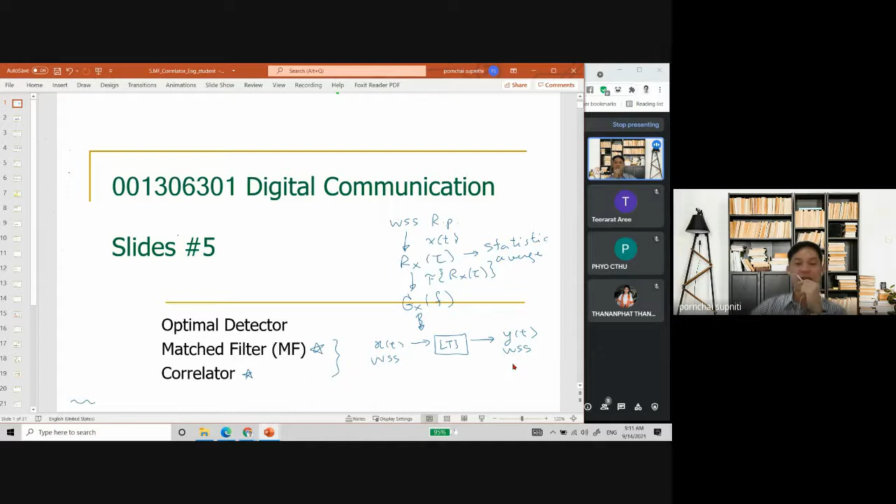And I think last time we did this, my is equal to mx multiplied with h of 0, where h of 0 is the DC of the linear system frequency response. And also for the power spectral density of the output, it is magnitude of HF squared multiplied with power spectral density of the input. So these are the main results from last time.

So today we are going to come back to what we were left off from the last 2 or 3 lectures, because we spent a lot of time looking at the noise and the random variables. So today we'll come back to a system. So what are we going to look at?

Let us consider a simple communication system with an additive white Gaussian noise channel. So whenever we talk about transmitting some data bits, modulated, this is modulation, it becomes pulses, and then we transmit through AWGN channels.

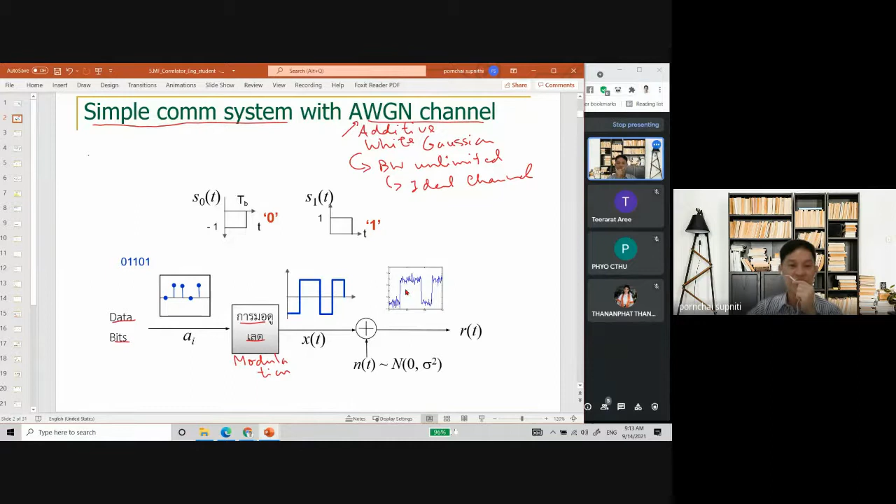Whenever we talk about this, it means that we focus our scope on the channels with unlimited bandwidth, or in a way it's an ideal channel. However, in general, the channels have a limited bandwidth and are also not ideal. But when we talk about some modulation scheme and also how to demodulate it or do detection for modulation like this, oftentimes we only look at the AWGN channel. Later on, we'll look at the channel with limited bandwidth and also with white Gaussian noise as well.

So this is a simple communication system, and in this case, it is just NRZL. For bit 0, we just transmit a very simple square wave of negative amplitude, while for bit 1 we transmit the square wave of positive amplitude, and the length is TB. So that means that the energy is EB.

When we talk about this, let me go through a little bit of information here. When we talk about different pulses for each bit, it means that for E0 and E1, we have the energy for each bit depending on bit 0 or bit 1. If you look from here, let's very simply look at what is the energy of bit 0.

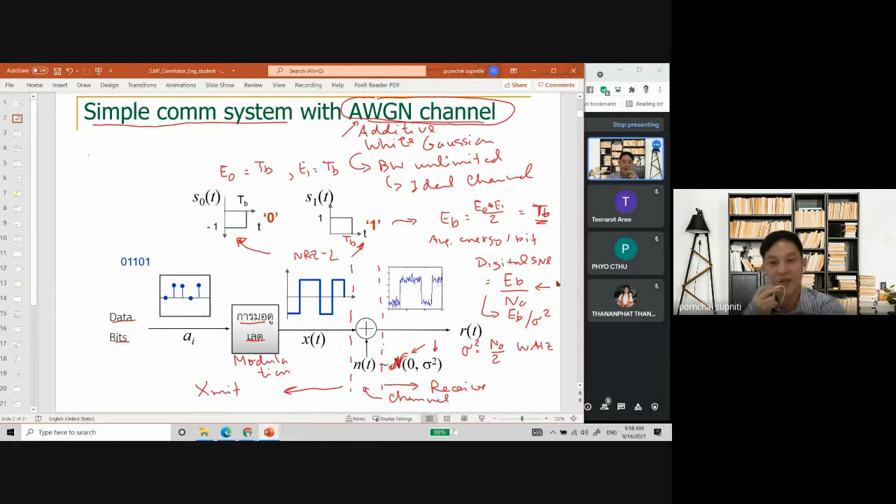Okay, so that's part of it. Next, let's take a look at these slides.

On the receive side, we can find the quality of the receive signal using something called the eye diagram. The eye diagram helps indicate the signal qualities on the receive side. And how is it constructed?

The eye diagram is not a crude way, but a very simple way of detecting the signal quality, and it can be used from the very early part of looking at pulses on the scope that we look at.

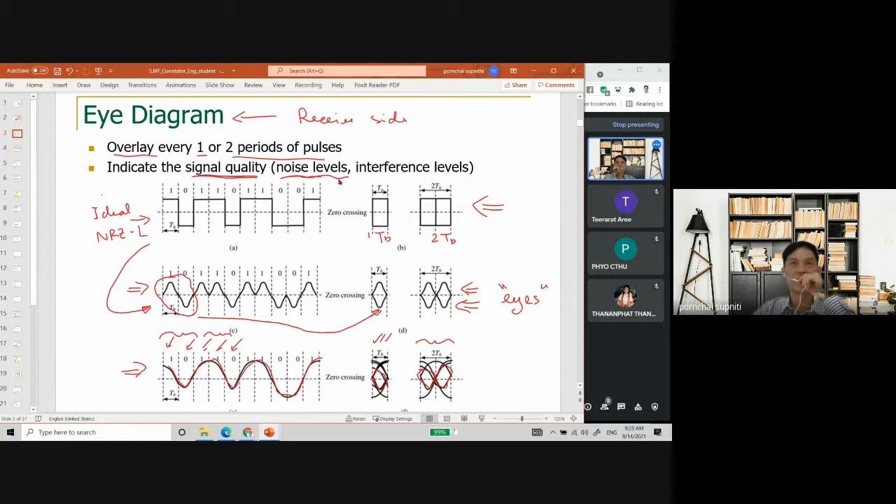So this is what we call the eye diagram. The eye diagram can be used to indicate signal quality like noise levels - are there lots of noise? Are there lots of interference or distortion or not? And also, we can look at the optimal sampling instant.

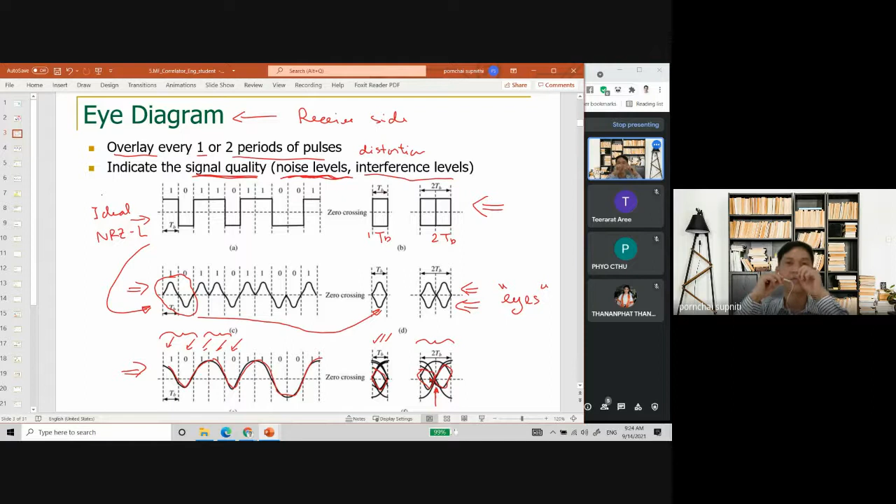For example, if we look here, we expect to see zero amplitude intersect here, but if this zero shifts to the right or to the left too much, it means that when we do sampling, it's not so good. So eye diagrams can be used for different things.

Okay, so let's take a look. I think I'm a bit slow again. Okay, so for a simple communication system like this, how do we make a detection?

So this is R(t), which is the received signal. In general, the signal will be noisy because of the noise in the system. Here, I don't put any effects of the bandwidth limitation, so it's not curved - it's just noisy.

So what can be used on the receive side? So all this is the receive side. A simple way of deleting noise is using a low pass filter.

Teerarat, what is the difference between low pass filter and high pass filter?

Low pass filter will filter out the low frequency signal. Actually, on the contrary, a low pass filter means that it only allows low frequency components. It rejects high frequency components. You can just translate it from the name itself: it only allows the low frequency components to pass.

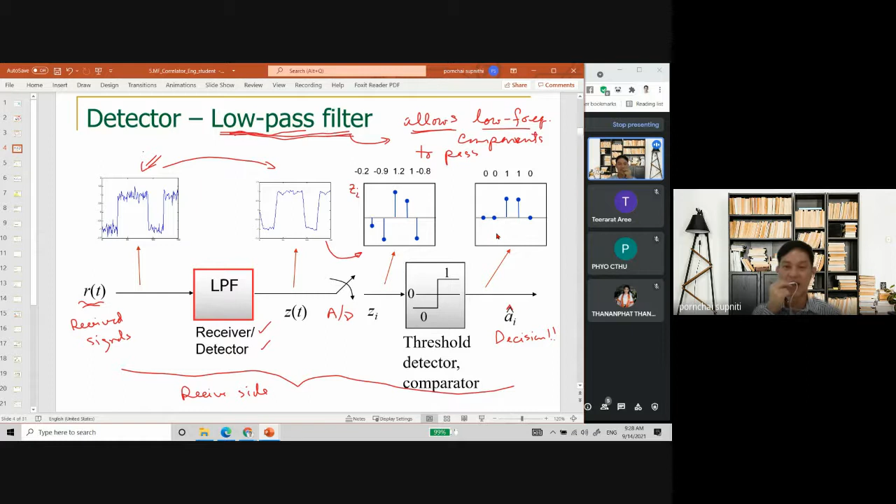You get what I'm saying? Yes. Okay, so we're not trying to duplicate or reconstruct transmitted signals, we're just trying to make a decision of what the bits and symbols are. So keep this in mind. Of course, after you make the decision, you can reconstruct, but maybe some bits are incorrect, so you don't reconstruct them correctly anyway.

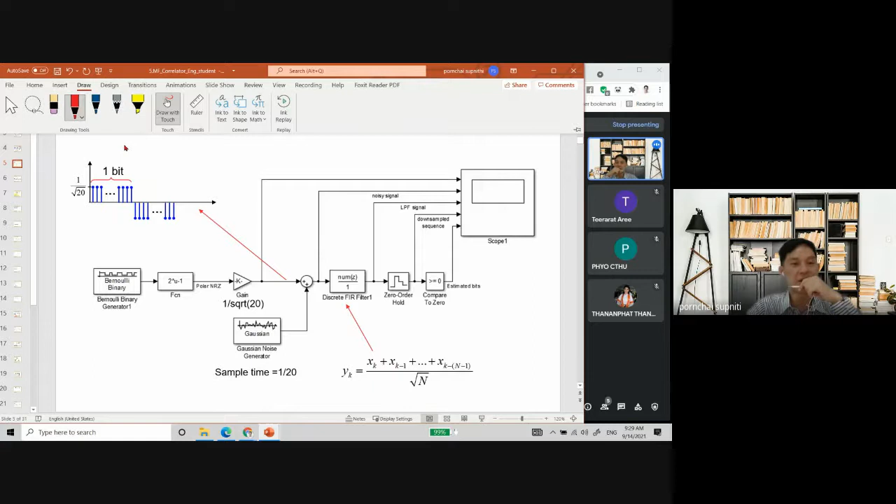Okay, let's take a look at the next one. This is the Simulink system that we are playing with today. We'll use this as a base Simulink system that we can play around with. Let me show you. I think you are familiar with this system already, but because we haven't come back to this for some time, on the transmit side, you know this already.

So in this case, we use NRZL, but we can use something else. And we added noise to it. On the receive side, this is the receive side. We can have a low pass filter here, where we can change the coefficients so that they become a low pass filter, simply by putting all ones, depending on how long this is, divided by square root of n.

So this is one way of doing it. And before the lectures on random processes or random variables, we also constructed here by using some type of filter, right? We used a filter block as here in order to generate different types of modulation schemes, but it's a simple one. On the receive side, if we construct it with a low pass filter, that's all we do, depending on how long it is. And we have A to D, and then we have a comparator. That's it, and this is a very simple setup.

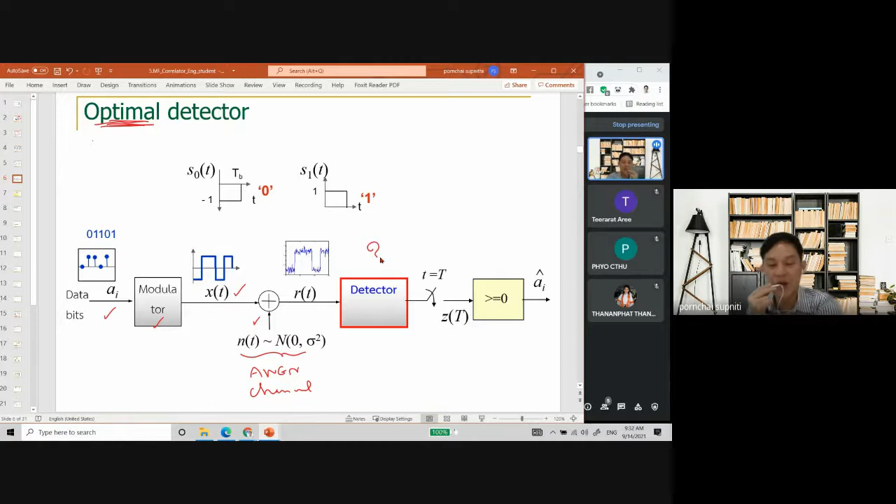To derive the optimal detectors, maybe you can guess, because in this lecture we are talking about two types of optimal detectors. One is called the matched filter, and the other one is called correlators. Let's look at this as a formal statement. So if we are given the pulses S I T, where I is represented by 1 all the way to M, and T is in the range from 0 to big T, meaning that it has a limited amount of time.

And there are M types of pulses, depending on whether they are binary or non-binary. If M is equal to 2, then there are only two types of pulses that are transmitted, okay?

Then we added noise, and then if the detector is a linear time-invariant system, with the impulse response of the detector as H0(t), or the spectrum, the frequency response, H0(F). The question is, how do we design the detectors for the digital pulses? Basically, in order to design the detector, we just need to find the H0(F) or H0(t) that is optimal.

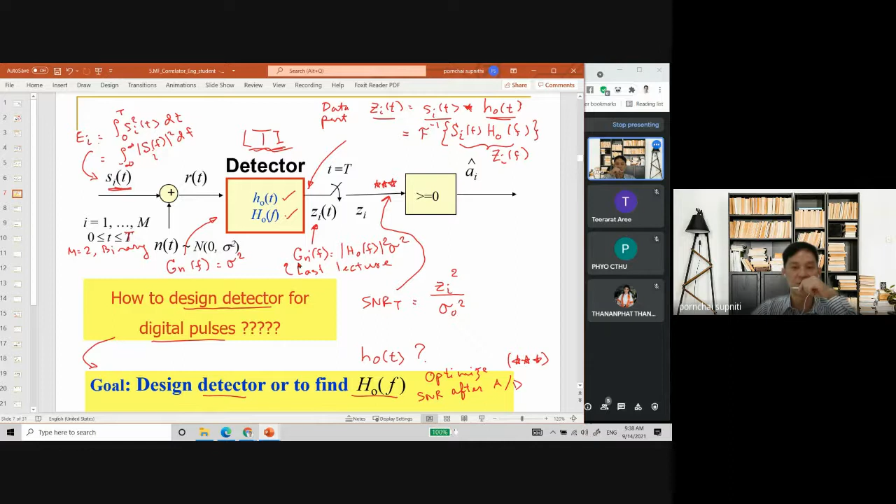So what is the SNR at this point? I can write it as SNR(T), where T represents after the A to D. This will be equal to the data part through the detector, squared, divided by sigma 0 squared, where sigma 0 squared is just Gn(F). So this is what we want to optimize. You can optimize it some other ways, but sometimes if you optimize different parameters, it's not easy to derive what we want.

So do you have any question about these slides? If you have a question, please ask now, because for the next two slides we will utilize these results and then derive the optimal detectors. Do you have any questions so far? Let me see, what time is it? Okay, any questions so far? No? Okay, anyway, so let's take a look more. If you have a question, we'll come back to it.

So let's do a derivation of the optimal filter, and in this case, the optimal filter is actually called the matched filter. So step one, we will compute the SNR after A to D, which is SNR(T) equal to the data part passed through the LTI detector, divided by the variance of the output noise at the back of the detector.

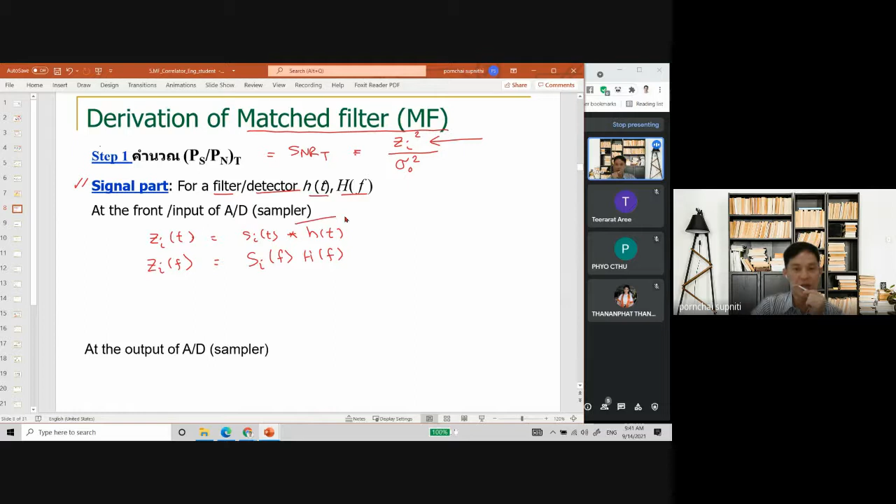So in a way, we can say that ZIT is just the inverse Fourier of ZIF, which is the inverse Fourier transform of, let me write F clearly so we don't get confused with the T, SIF and then HF.

Also for Phyo and Thananphat, I just want to tell you one more time that it's very common for us when we write in time domain, we use the lowercase. When we write in terms of spectrum, we often convert to capitalized letters. That's all.

So this is before the A to D. This is still time domain, right? So at the output of A to D, we have Zi, which is equal to ZIT, T equals to, let's say, at every period, or at every period of the bits.

Also for the inverse Fourier transform, I can write this as integration of SF multiplied with HF dF. This is the Fourier transform formula, and we have to multiply with the exponential term, which is e to the j 2 pi ft, and then the f, from negative infinity to infinity.

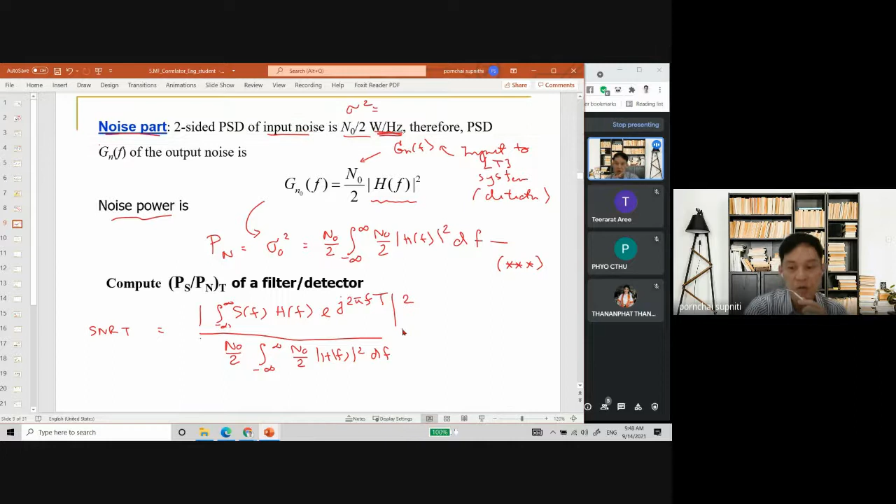Well, from here, maybe it looks a bit difficult, but if you look in the textbook, basically we can use this relationship called Cauchy-Schwarz inequality, meaning that we can simplify the numerator on the last page.

Cauchy-Schwarz inequality says that given two functions, if we have function f1(x) and function f2(x), and if we have a magnitude of integration of f1(x) multiplied with f2(x) dx, the whole magnitude squared, this is less than or equal to the energy of each function multiplied to each other.

This is in a way similar to the concept of triangle inequality. Like in geometry, it's related to the idea that when you add two sides of the triangle, it's less than or equal to the summation of each side added together. But this is in terms of function, so it's a little bit different.

And the equality in this equation occurs when f1(x) is equal to a multiple of f2(x) conjugate. This is conjugate - not convolution - because f1(x) and f2(x) in general can be complex functions.

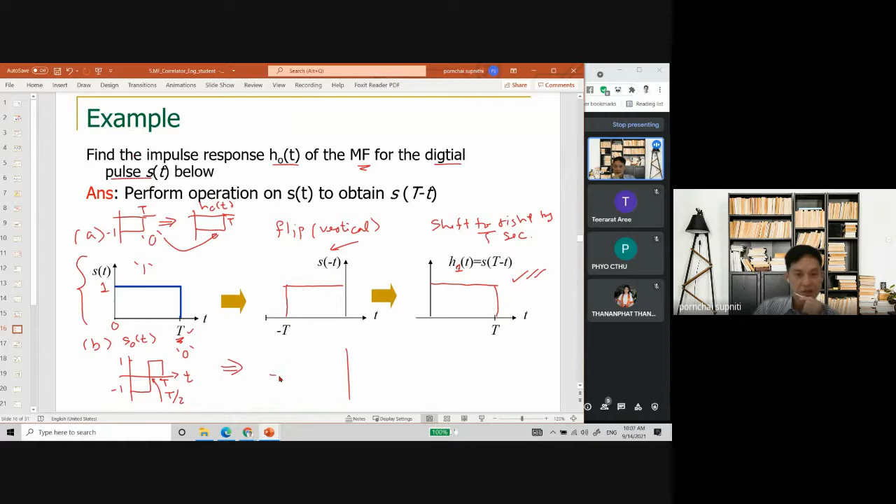First, to find the matched filter, we have to flip with the vertical axis. Okay, when we flip it, what do we get? From -T to -T plus T over 2, what amplitude do we get?

During this period, what do we get - positive or negative? We just get positive. And this part we get negative. And then when we shift to the right, we just get a flipped version of the pulse S0.

Wait, sorry, I think in another class this is called pulse 1. So we just get something like this, right? Yeah, that's why we call it a matched filter.

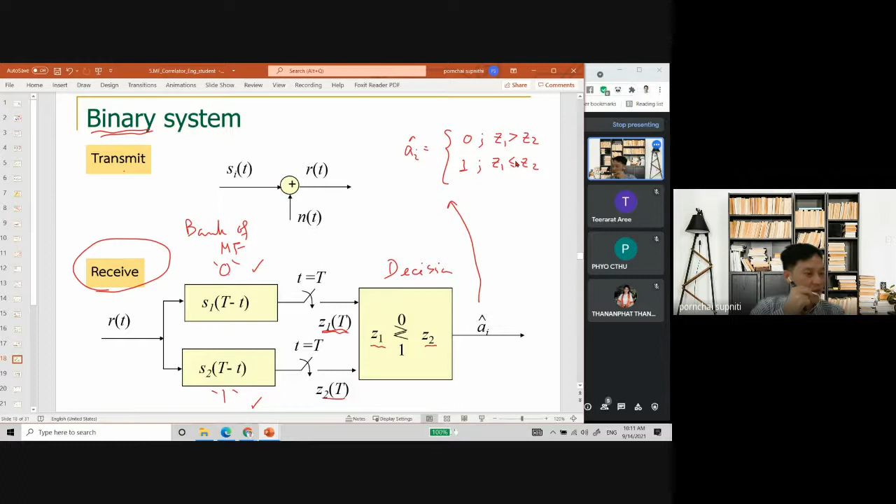So let's take a look at this example, okay? I don't think I have time to go through all the convolution stuff. Anyway, the matched filter, when we look at how it goes in the time domain, is in general a little bit more complex than the other structure. We will look at it after the break, okay? But let's look at this example first.

So this is an example where we want to look at how the signals look like at each step on the receive side. Let's say that on the receive side, at one time we have these positive amplitudes, and this is for an NRZL system.

On the receive side, we have the matched filter for bit 0 and bit 1 separately, so we don't make a decision yet. We just let this pulse go through two branches. Let's look at the bottom branch, it's a bit easier. So what is the output at the bottom branch? The output is this one.

Let me use red color for this, and the top one is Z1(t). So the output is just the convolution of the received signal and the impulse response of the matched filter.

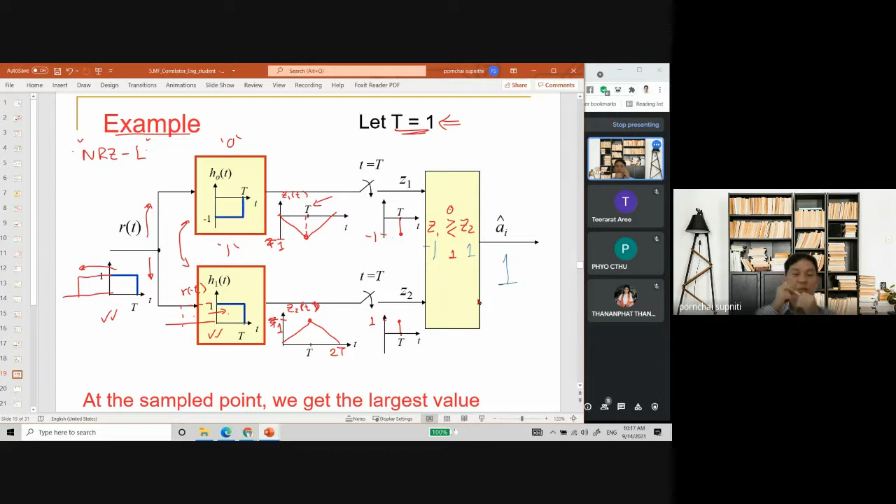Lastly, before we take a break, I want to look at this a little bit more. If you do a convolution of two rectangles of different sizes, let's say one is 1 second and the other is 2 seconds, in this case you get something similar to a triangle, but you get... I don't know what it's called, this shape. So this is 1, 2, and 3. It's basically just the overlapping area of one over the other as you move it.

You can fix one, either one, for simplicity. Let's say you fix the right one and flip the left one, and you just move it to the right. The more it overlaps, the more it travels to the right, the more area you get. When it passes by, suddenly at some point it will go down.

So in a way, matched filter helps collect energy of the received signal. So please review the convolution.

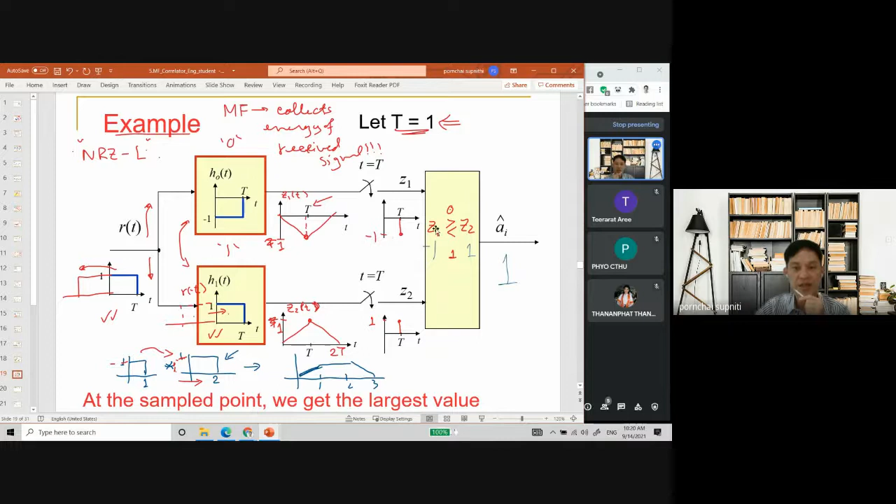If you look at the decision here on the right hand side, instead of comparing Z1 greater than or less than Z2, we can move Z1 to the left hand side, and then we compare with 0. We can do this.

It means that because Z1 is the sampling of the output from matched filter number 1, and Z2 is the sampling of matched filter number 2, instead of having two match filters, we can do it like this.

We have R(t) comes in, and we can pass it through H0(t) minus H1(t). This is because if we look at it before sampling, we have Z1(t) minus Z2(t). This is just integration of R(t) times H0(t) minus H1(t), or convolution, and dt.

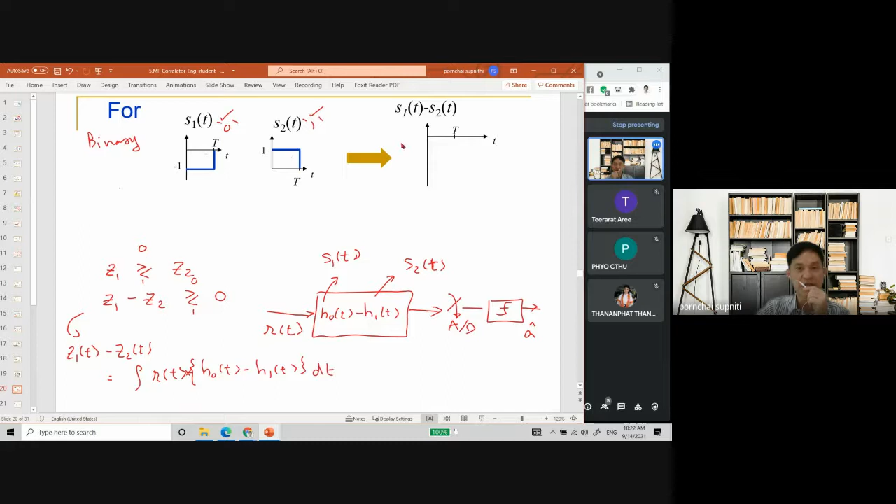We have like this: minus one is minus two, right? So it means that we can have a matched filter like this.

And A to D, and then make a decision whether it's more or less than 0. Let me call this Z. We just compare whether it's more than or less than 0, and then we make a decision.

And also you can flip this thing. I don't need to put -2, I can put -1, because here we only check the sign. I can flip this from negative to positive, but then I have to switch between these two numbers.

So that's the way to reduce the number of matched filters. So we can do the matched filter in Simulink like this.

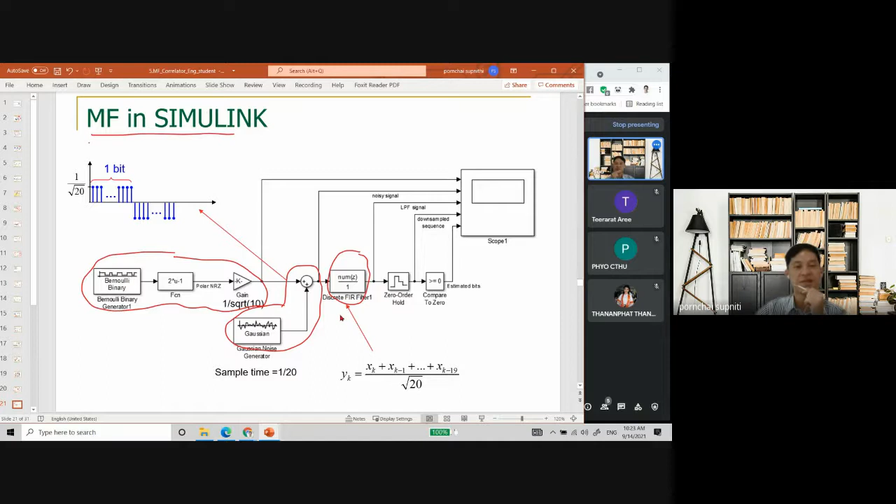So for NRZL, we can just transmit what we transmit, we add noise, and then we can just use one filter and define it as the matched filter. We can define this as matched filter because in this case you can see that the matched filter here is just a constant value.

But in Simulink we will switch. Instead of having this as a negative, in Simulink we will have this as a positive, and switch this. So we'll do this instead.

Let's say big T is 1, and we'll do this instead. We can just define the filters as ones, and depending on how long this is, depending on how many samples you use for each bit.

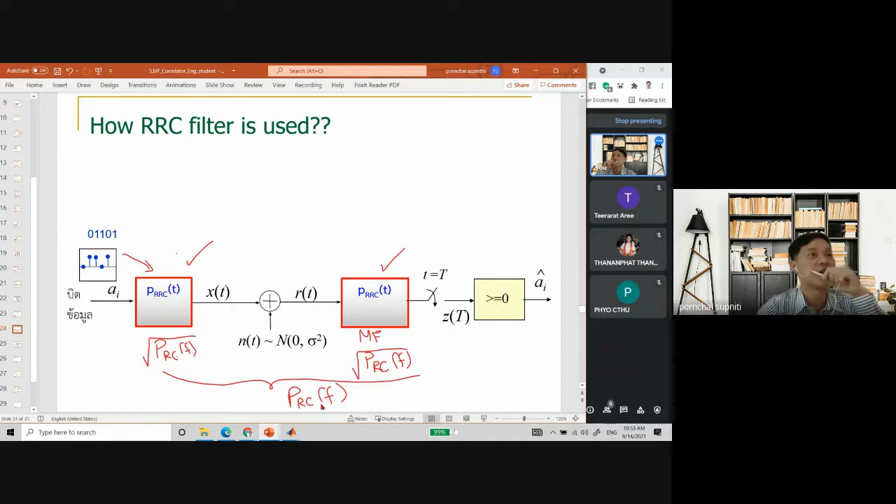Basically what we do here is look in terms of spectrum: for the root raised cosine, the spectrum is the square root of P_RCF. For the matched filter, because it's the same shape, in terms of spectrum we have the square root of P_RCF again. So that means equivalently, from the transmit side and the receive side combined, the pulse that we effectively use is just the raised cosine pulse, because the multiplication gives the resulting filter.

Next, if we have a non-binary system or M-ary system, in this case we cannot reduce the number of matched filters that we use. We have to use M matched filters.

This is the structure: the first matched filter matches symbol one, the next one matches symbol two, and so on up to pulse M. Then we have an A to D for each bank—banks just meaning a series or set of filters. At the output, whichever one has the higher value, we make the decision for that specific symbol. So we have a decision rule: select Si which gives the maximum Z, the output of the A to D. We select the symbol corresponding to the maximum value of all the A to D outputs.

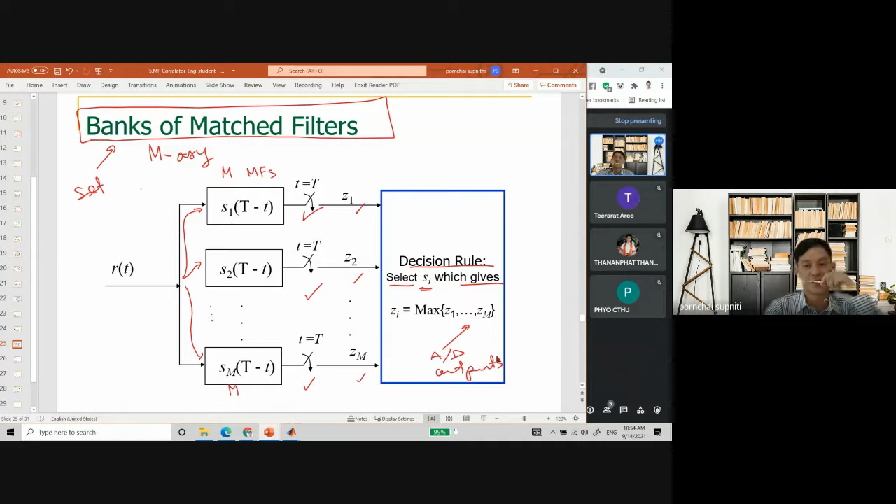So that's what we do. For the remaining slides, I will talk about another structure as an alternative to the matched filter. Let's take a look at it—it's actually much simpler.

This structure is called correlators. As you know from the previous lecture, when we say correlate, it means if we correlate two things—let's say the received signal and some pulse—we multiply them together and integrate within the period or time of interest, whatever it is. So this is called correlators.

Let's derive quickly what the correlator is. From the matched filter, the output of the matched filter is Z(T), the integration of the received signal multiplied with the matched filter. And if the matched filter has the impulse response, let's say H(T), I write it in general.

So Z(t) is actually R(t) convolved with the impulse response of the matched filter in general, which is equal to the integration of R(tau) H(t minus tau) d tau. And for the causal filters...

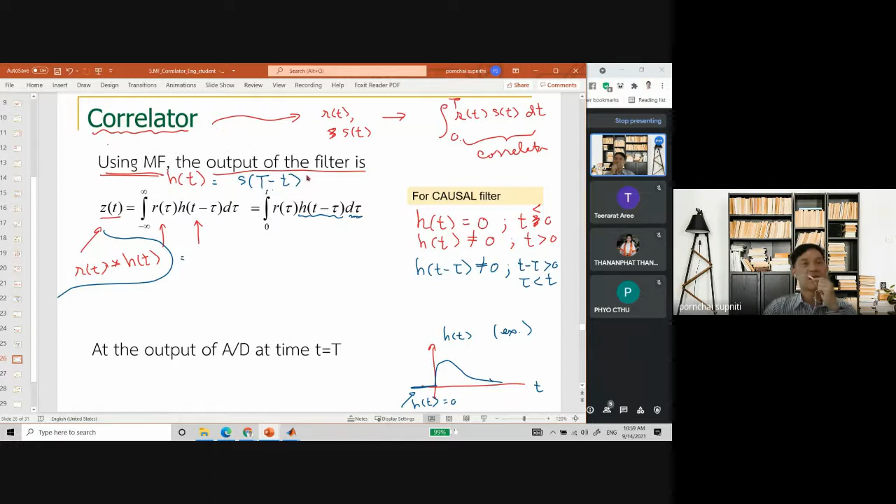So I'm going to derive this by putting in - we know that h(t) is equal to s(capital T minus t). This is from the previous slide, for any matched filter of the pulse s(t) in general. So here I can write it as the integration from 0 to t of r(tau) multiplied with s(t minus tau), d tau.

And this can be written, if I look at the output of the A to D, as z(t) equals... this is at the output of A to D. So at the output of the A to D, I have z(t), or z_i.

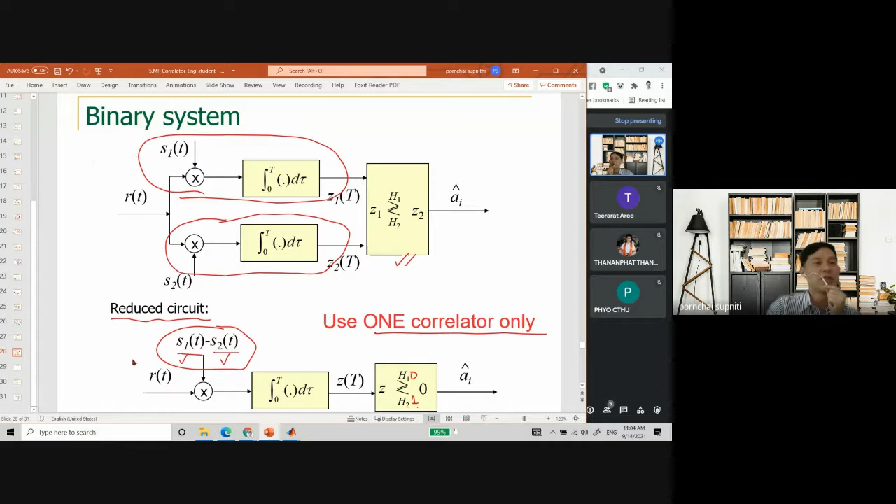Let's look at another example for correlator. Here you can see that because we use S1 minus S2, we can reduce this circuit a bit further. So if we subtract S2 from S1, we have this shape, right, from previously.

So if we do correlators with the receive signal by multiplying this with S1(t) minus S2(t), which is minus 2, and then we do integration from 0 to t, we compare the output, whether it's more or less than 0, and then we make the decision accordingly.

We can reduce even further. We will notice that instead of multiplying with any negative values, we can multiply it with a positive value, like 1, which we don't even need to write because it's just multiplied with 1. We can just leave it as it is, but then we need to change the decision at the back.

Instead of having 0 and 1, we do 1 and 0. So in a way, we flip the decision here.

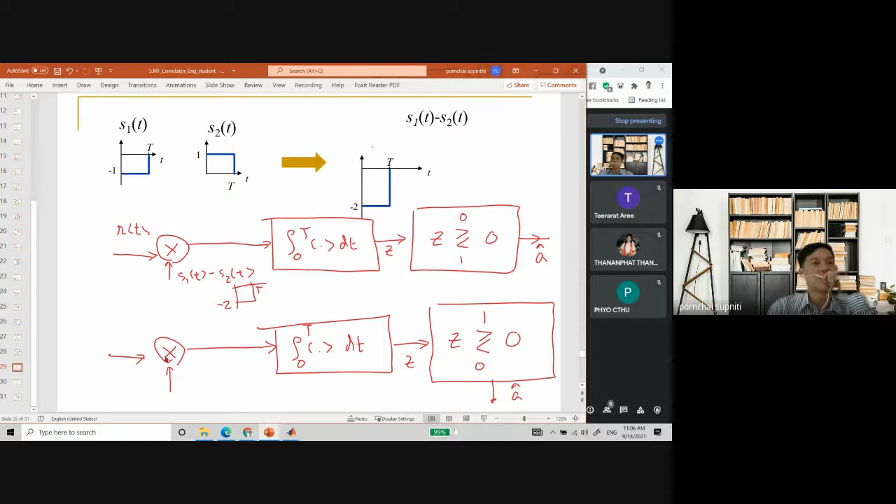This is what we will use in Simulink. We don't even need to multiply with anything here. For this type of NRZL, we can just send whatever r(t) to the integrators only. So equivalently, that's all we can do, but this is only for binary systems where we can reduce the number of circuits like this.

Okay, and the last two slides - this is for Simulink. Maybe we don't have time to do it in the lab, but maybe I'll ask you to do it at home. So to simulate in Simulink, we can do correlators by taking the received signal r(t), multiplying it with the same pulse, which is in this case S2(t) for bit 1, and this is followed by integration.

So this part is the correlator in Simulink, and the rest is almost the same - just A to D, and then compare with 0, and so on. If we don't do correlator today, we'll do match filter, and then we play with correlator next time.

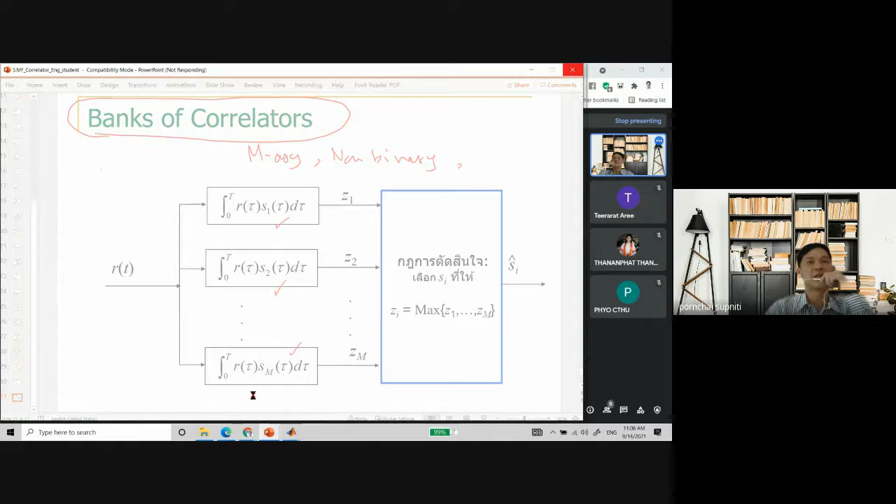Lastly, last slide: for an M-ary system or non-binary, if we don't do any simplification, we can use a bank of correlators. Meaning that for each symbol, we need to have M correlators. And then we make decisions similarly to the match filter as well.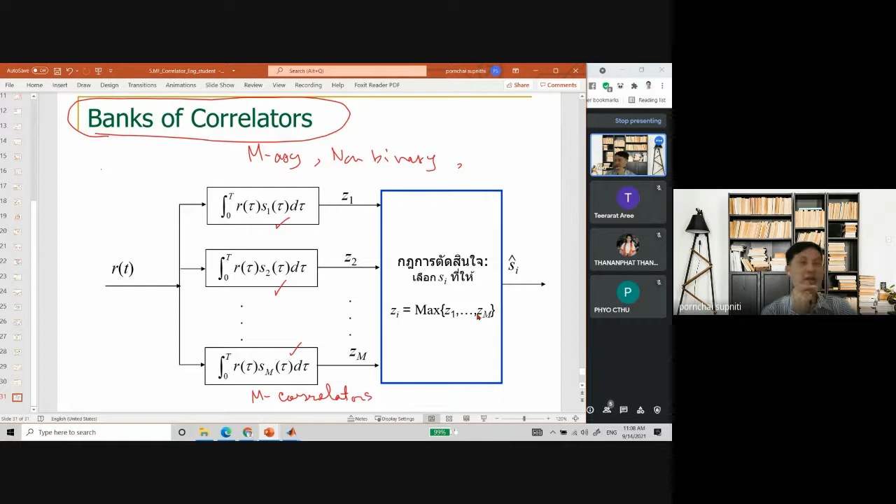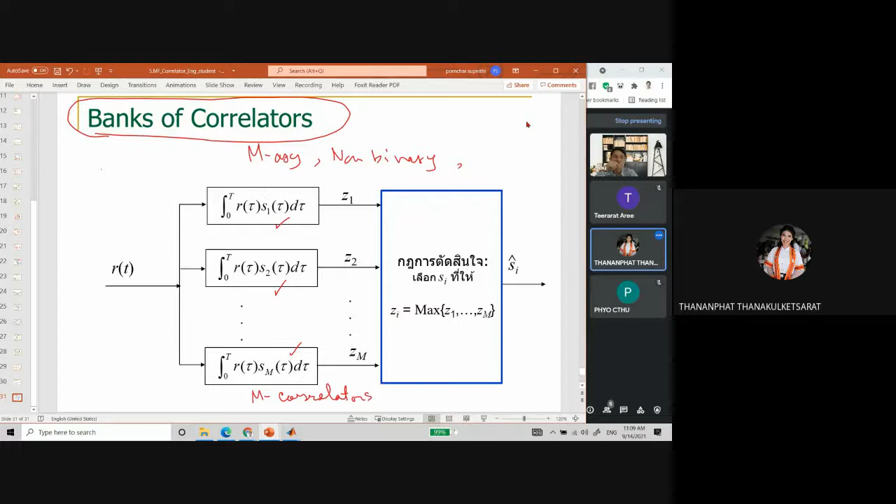Any question before we go to the Simulink lab? No question at all today? What's going on? Thananphat, any question today, maybe from last time? No, teacher. Oh, so you understand everything? Okay.

Okay, so let's go to Simulink today. I sent you the file already, so we can take a look together. Let's start your Simulink program.

So this is almost the whole system, and this is what you need to do. Actually, could you possibly turn on the camera, everyone? I think it's a bit too inhumane to just look at nothing for many hours. Okay, yeah, please turn it on. And the lab is quite short, but maybe we need to look at it together, so that it's not difficult.

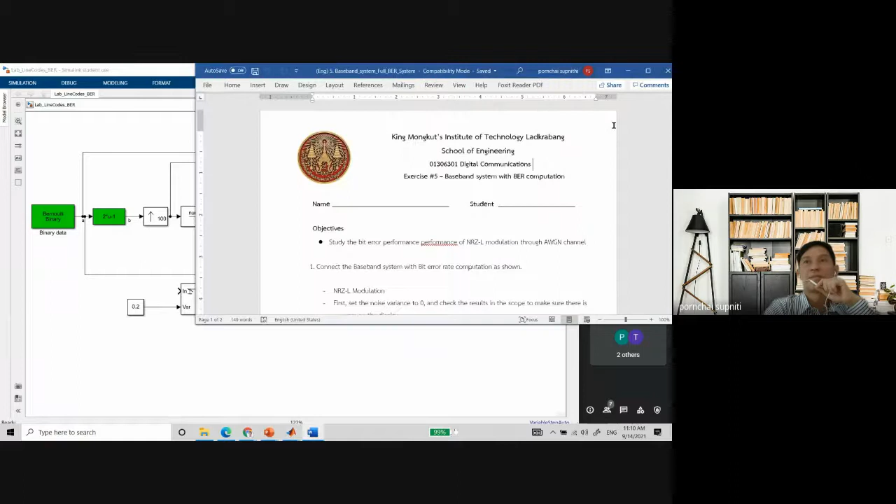Okay, so this is the lab today. So now that I'm talking about it, please open the Simulink program and then load the file - they are in the Google Classroom. So in this lab, we will study the bit error rate performance of NRZ-L modulation through an AWGN channel.

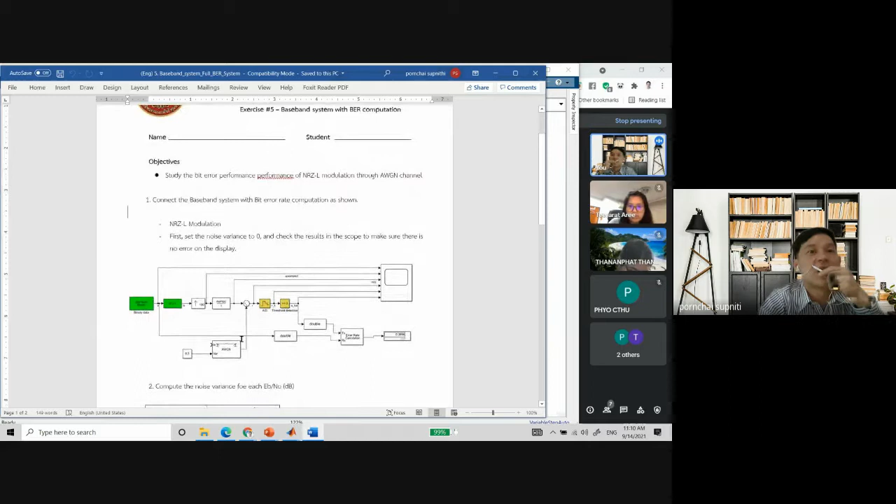So this system has already been given to you, so you don't have to connect it. And we will compute the sigma square. Actually, let me take a look in the Simulink - this is variance, no? So it's sigma square. We can modify the SNR by changing this value, but first we need to compute the variance.

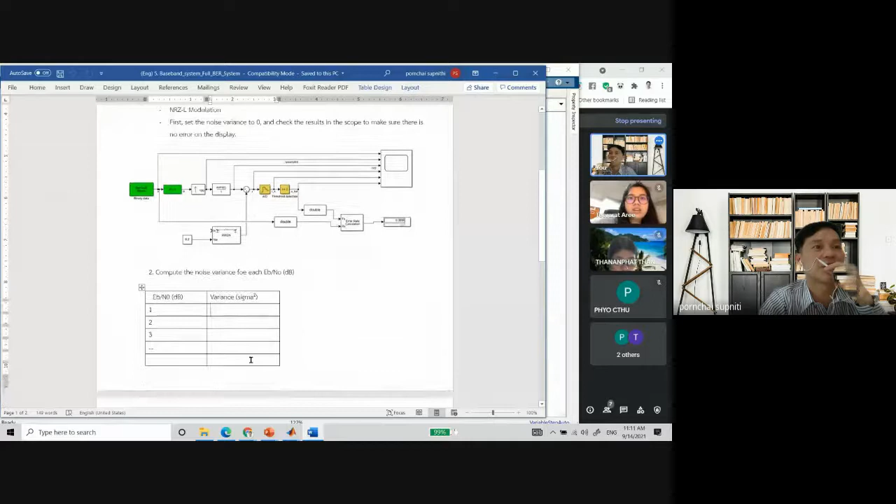So in this table, maybe you can compute sigma square for one value, let's say 9 decibels. Let me go to the note. I think they have the whiteboard, right? Okay, let me start the whiteboard so I can write it. Actually, I can write on the PowerPoint as well.

So how are we going to adjust the SNR? Let's take a look together.

So in Simulink, this is how we're going to... let me take out this line first. Very simple formula actually that we are computing for sigma square. You can use MATLAB to compute, okay, but let me write down the formula for SNR, okay, so how to adjust the SNR, the Eb over N0.

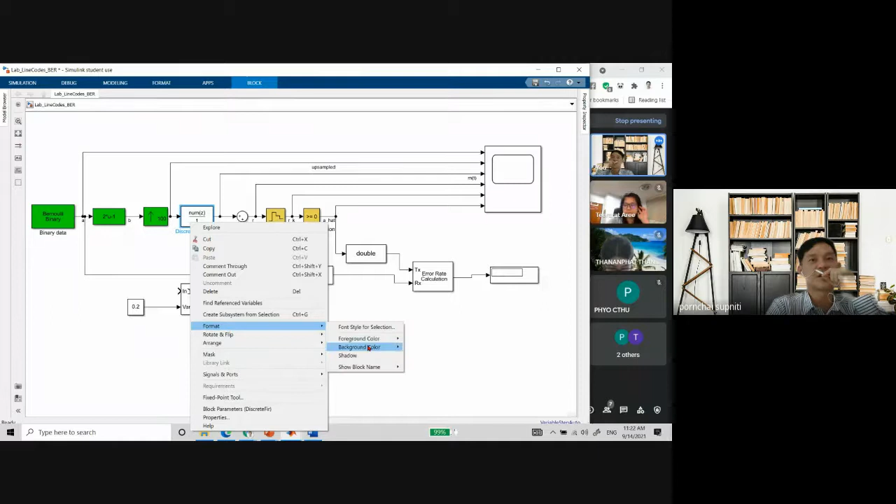So the first part you should do is make this variance very small, okay, to constitute a very, very high SNR. Let me do something very small like this. Just do it, so we have very, very large SNR. Oh, cannot read it. Okay.

If you notice, if you double click in the numZ here, I put 1 over square root of 100. So this will be the same, no? I don't change anything at this point. Let me just check whether it's correct or not. So here we have 0 and 1, and then we have positive, negative.

And then on the receive side, at this moment, I don't have any matched filter yet. So you notice that whatever I receive, I just sample it, okay? I just do sampling and then make a decision. That's all I do, okay? So let's try to run this system and see what we get. If you take a look here, this is called the error rate calculation block. Let's take a look together, no?

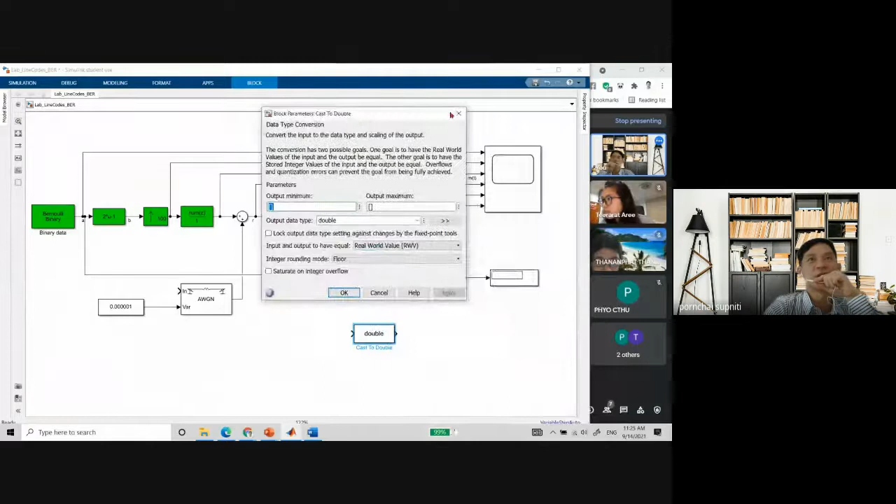Okay, let's search then. Here, right? Is it this one? Let's take a look. Yeah, I guess this is the one. Yeah, there is data type conversion. Yeah, I think you can search with data type conversion.

Thananphat, so did you get sigma square finally? I think she doesn't hear me today. Yeah.

I think you can just do data type conversion. I get 0.079. Okay, just use that number for your lab.

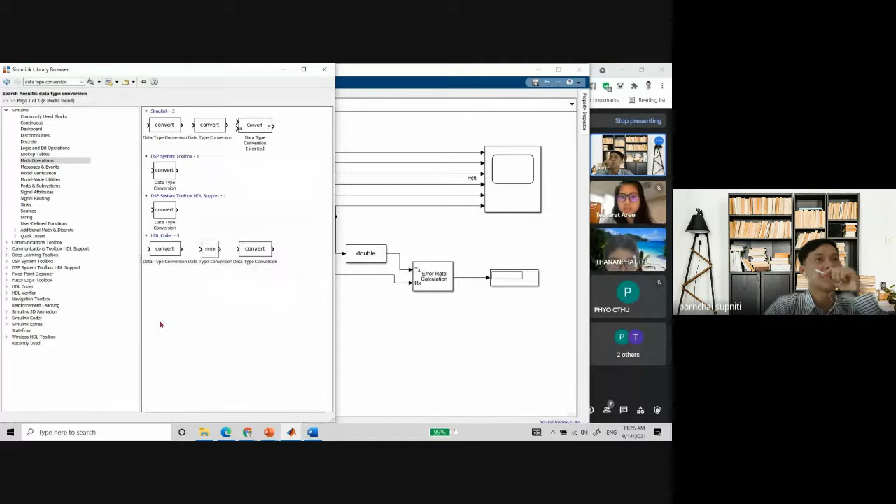Yeah, I think this, yeah. See, Teerarat, do you see on the screen? So these are the data type conversions. I guess you can use one of these. They are in different parts. Okay, the reason I need to use this is because here this is a logic - this is also like 0, 1, but this block, the error rate calculation block, requires the double type as input. So I need to force change the type of data here.

Okay. Phyo and Thananphat, can you open the Simulink file that I sent, or you cannot? No, I'm building it my own. Oh, really? Okay. Yeah, I just want to reduce time by giving you the file, so you don't have to do it. Okay, so the block of convert and double is the same, right?

Yeah, yeah, but when you change to case double, then it changes the word double itself here. See? Okay. And how about the output of the error rate calculation? Display. What do you mean the output? It has an output here.

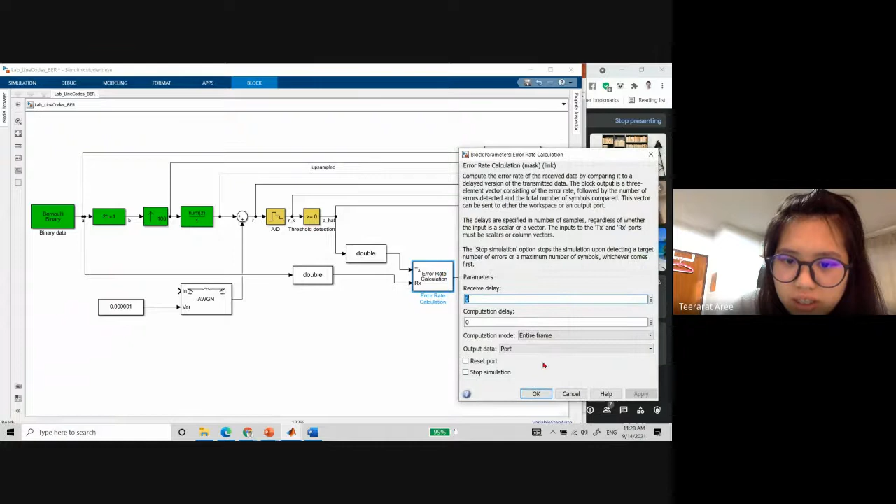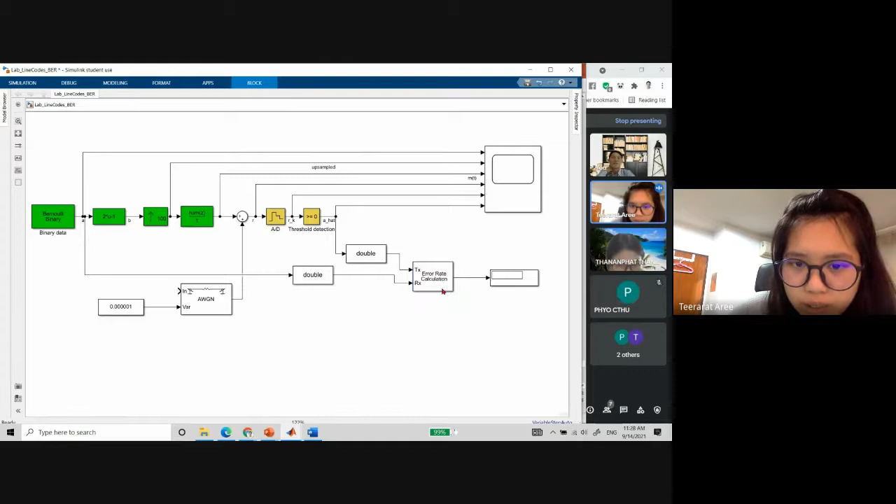Like for my system, it doesn't have the output for the error rate. Maybe you have to double click it and see what's the output here. It can be workspace, it can be data, depending on what you want. Okay. So whichever block doesn't have this type of port, you can double click and see what you can adjust. Okay.

Okay, you got it, everyone? Use the Simulink file I sent if you can open it. I think it's .slx? Yeah, this is the file. What's the file type? I thought it was double - is it .slx, isn't it? Yeah, yeah, you can open it with MATLAB 2020 at least, or higher is okay.

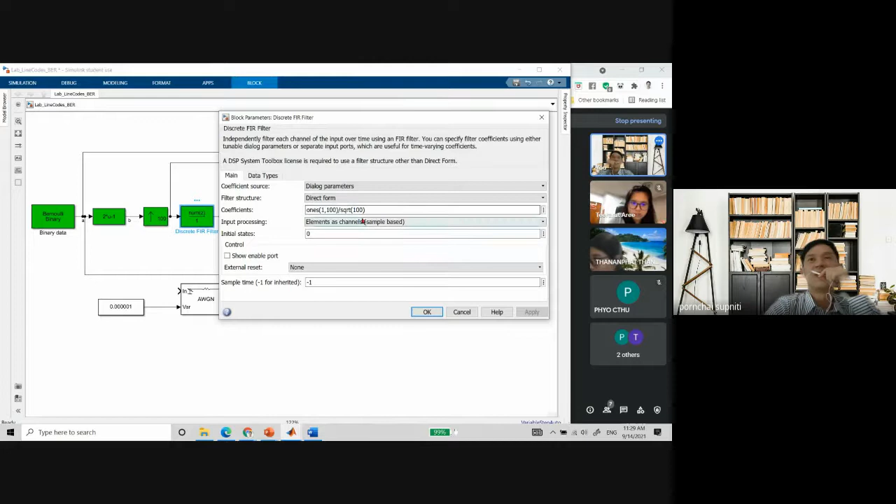Okay, and don't forget you need to change the energy here. Okay, is everyone ready? Don't forget in num_z you have to make it ones, then 100, then square root 100. Okay. If you upsample more than 100, I don't think you need to do more than this. If you upsample like 50 or 20, you need to change the numbers here, okay, to have energy of 1. Okay, so everyone finished? If you finish, just tell me.

Teerarat, you finished? The building? Not yet. Okay, I give you maybe 5-10 minutes then. Okay.

Also notice that on the scope, I put in many outputs so that we can take a look later. We will use this as a base to change the receive signal in terms of using matched filter or correlators.

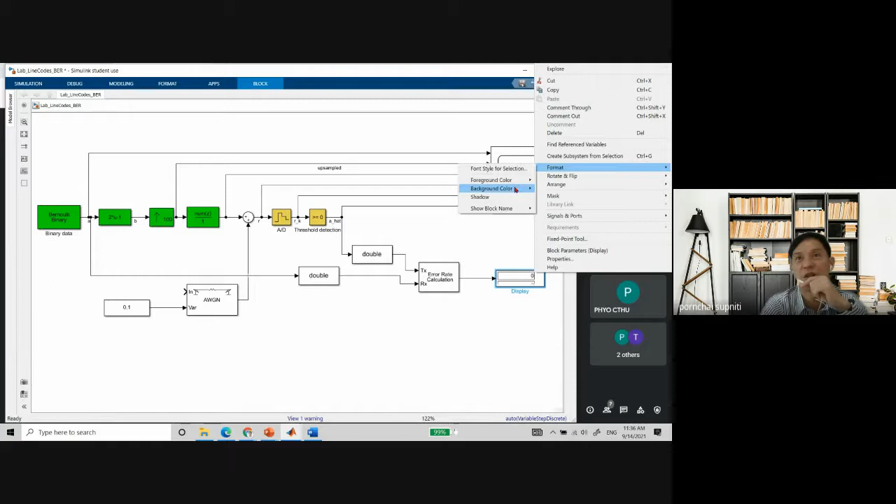Okay, low SNR. Let me run this, and you take a look here on the right hand side. Let me change the color so it's easy for me to see. Let me change to... oops. Let me set it in

light blue. So let's look at the light blue display and see whether the number goes up. I see, earlier I didn't put it large enough. This is the number I ran. Okay, let me run the system now.

Let me do 1,000 bits, so it doesn't take a long time. Okay, so take a look, this is how it happens. Okay, already very, very quick. No, finished already.

So I run 1001 bits. There are 370 errors, and the bit error rate is 0.3696.

Okay, so this is what we do. For this system, which is not a matched filter, everyone can work together. Let's compute the variance for EB over N0 from 1 decibel all the way to 10 decibel. Or if you want, you can run the variance for the values that you computed earlier, which are 7, 8, and 9.

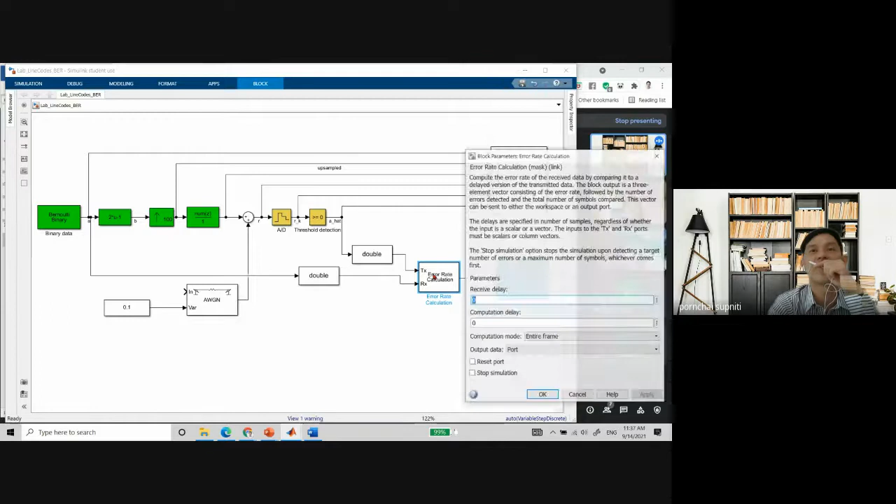Also, take a look at this block, error rate calculation, everyone. Let's take a look at this block. I think we can set one condition here. Let me see. Let's take a look together at this block. Everyone, look on your screen.

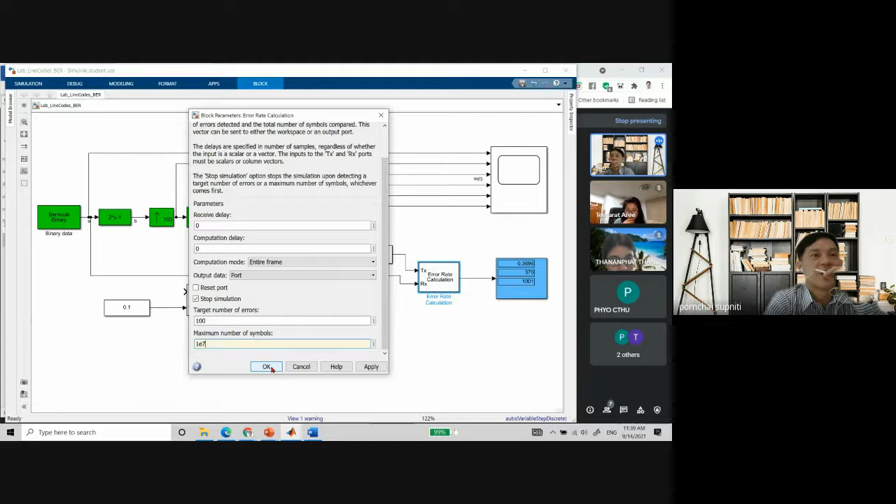I'm going to do this. Okay, so I press okay. So take a look here. So what you will do is when you compute the variance for the whole table, you put variance here one at a time and then compute bit error rate. You fill in the table until it's finished, okay? Do you get what I'm saying?

The value that we record for bit error rate is here, the first one. Or you can compute it yourself.

Also, there's a little bug here, but I haven't had time to change it. We're supposed to have 1,000 bits here, right? So let's take a look now. If I run again, but I don't run with 1,000 because I set it, I can set these as very large errors, very long. Okay, and then I run it, and the system will stop by itself.

Okay, take a look here, everyone. Now, when I run again, it stops at 100 errors. See, it stops here, and it stops after 273 bits and computes the bit error rate. So this way, we don't have to change the number of bits we run too much. We can just put a lot here, like 10 million, just large numbers.

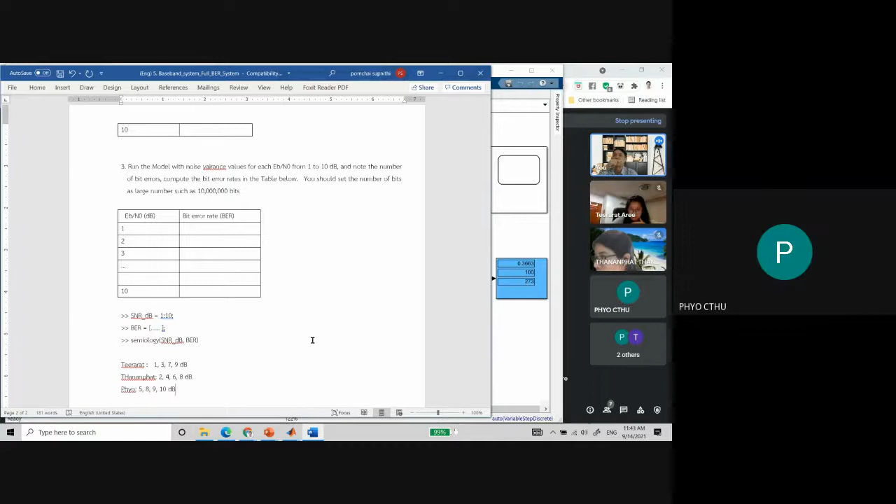Okay, how about this? And then we combine together the sigma value and also the bit error rate.

Let me take a look on the whiteboard a little bit. Oh, where's my whiteboard? It's gone. Oh, I see, I wrote it here, not on the whiteboard. Okay, so here is 0.5 multiplied by 10 to the negative 0.1 times SNR decibel. So you can use this already very quickly.

Okay, so what does each of you get for the variance? Let's put it down together so we can continue to the next phase. Okay, what is sigma square for 1 decibel?

0.3972. How about 2 decibel? Whoever finishes first, please tell me now. 0.315. How about 3 decibel? 0.2506. About 4 decibel?

0.1990 - which decibel? Is it 5 decibel? How many decibels? 5 decibel. Okay, what's the variance? I calculated all of them. For 5 decibel, 0.1581. Okay, for 4 decibel, 0.1990.

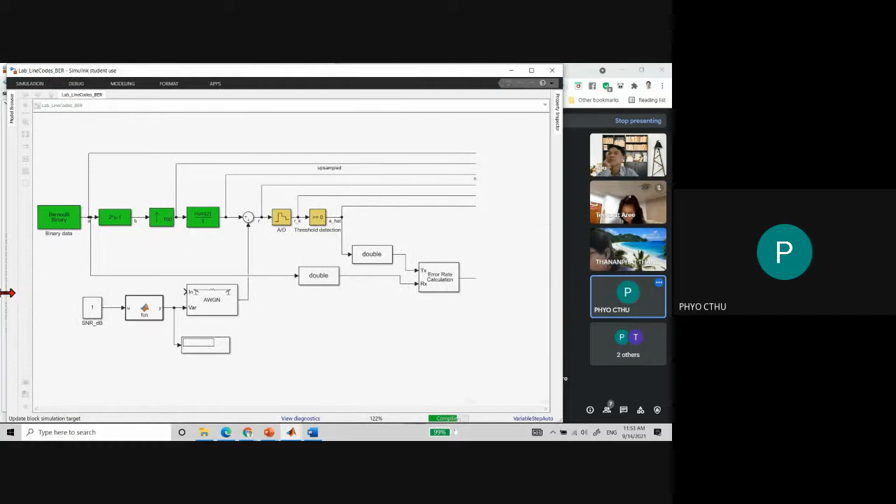Let me run to 2 decibel for fun. Actually, let me run a high number, like 8 decibel, okay, just for fun. It's gonna take a long time. Let's see.

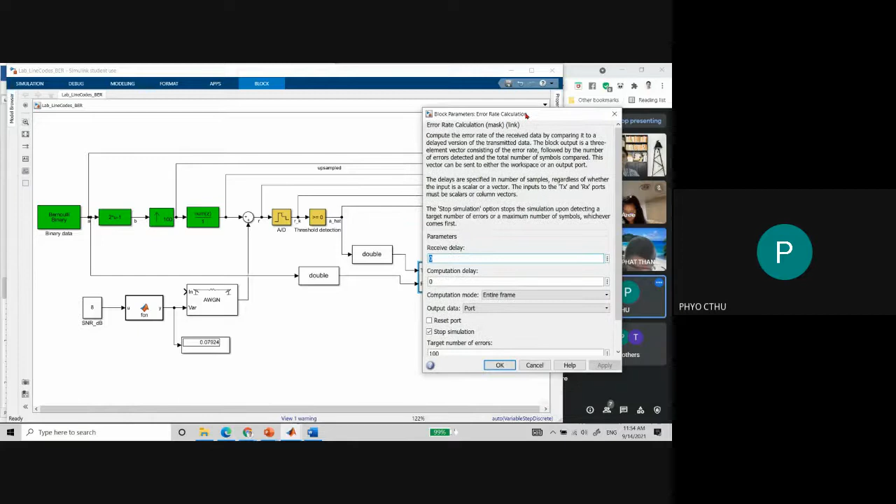So two pairs - when I disable the stop simulation, maybe you need to reset the port. Reset. Actually, it should start automatically, I think. Let me take a look at it.

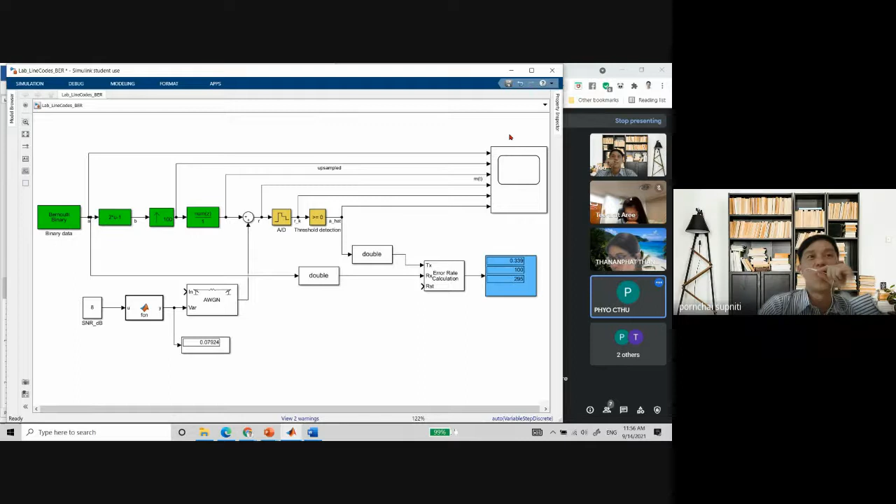Which decibel? For 4 decibels. But did you make these blocks correctly? Yes, I need to add a stopping point. So this is 100 divided by 295, right? Ah, I see. I think we computed it a bit wrong. Maybe we need to make the SNR very large.

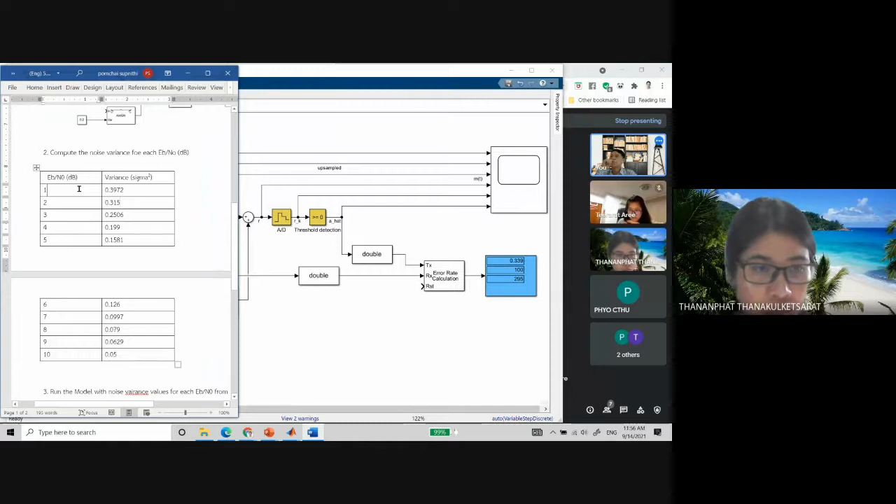Can we change the SNR in this case? I think the SNR may need to be changed. Let's do this for a quick change, because I forgot that this SNR is for the case when we use matched filter. So let's do something like this instead.

No, let's do maybe 3, 6, 9, 11, 13... 4, 13... 6, 9, 12, 15, 18, 21. Let's see how the number goes down, but let's look at these four first. I think it will be better.

If you want, you can set a system like this with me, so that is a bit quicker. I forgot that this SNR from 1 to 10 is for the case of matched filter, which will be much better.

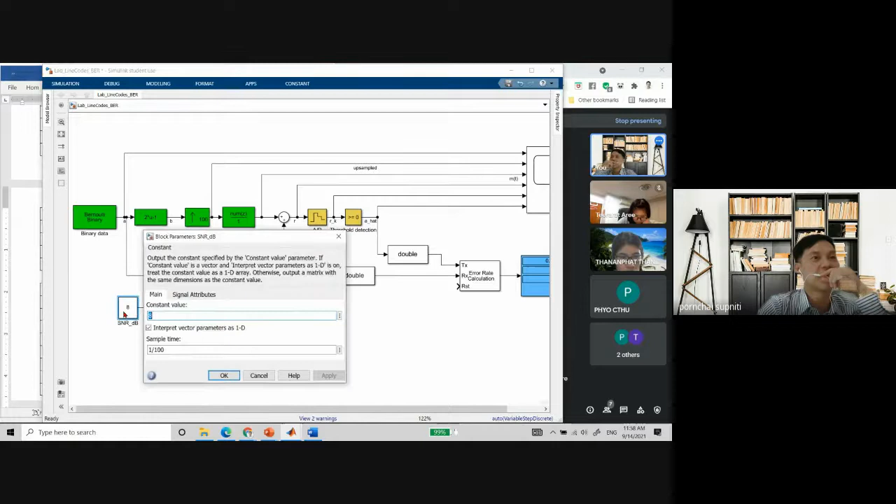So in this case, let me try 15 for fun. Maybe it has to be very high, but anyway, let's try this. Now it starts to go slower, to go lower. Okay, so maybe I should go even more. Let me try 21 decibels, and then run the simulation again.

Okay, now it will be much better. Good. Let's change the SNR to something like this. 27 and then 30. Okay.

For 3, 6, 9, maybe no need because 3 is very small. Let me try 6. I guess 3, 6, 9 may be too small. Maybe change this to start from 9. It's okay, we can do this. 3 to 30, but we jump every 3 decibels. Sorry, I forgot it's a different SNR range of interest.

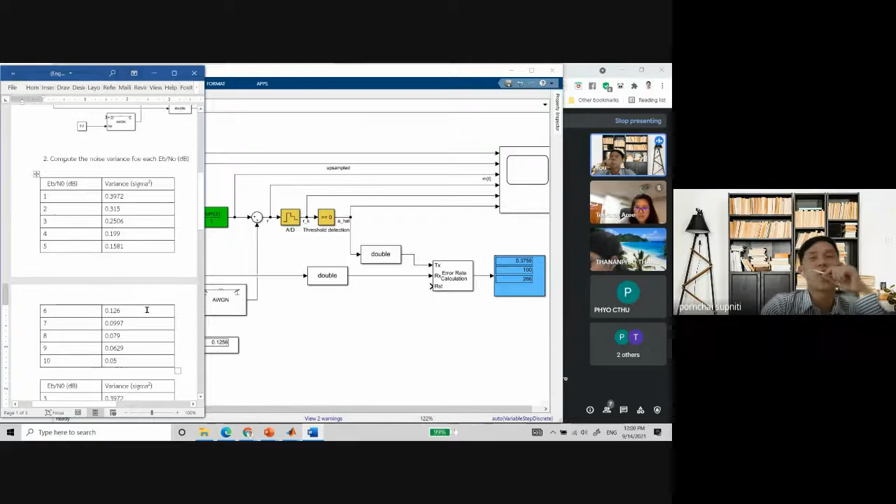But don't throw away this table. We can use it later for the matched filter and correlators. They can still be used, don't throw them away. But for the first part, let's use this instead.

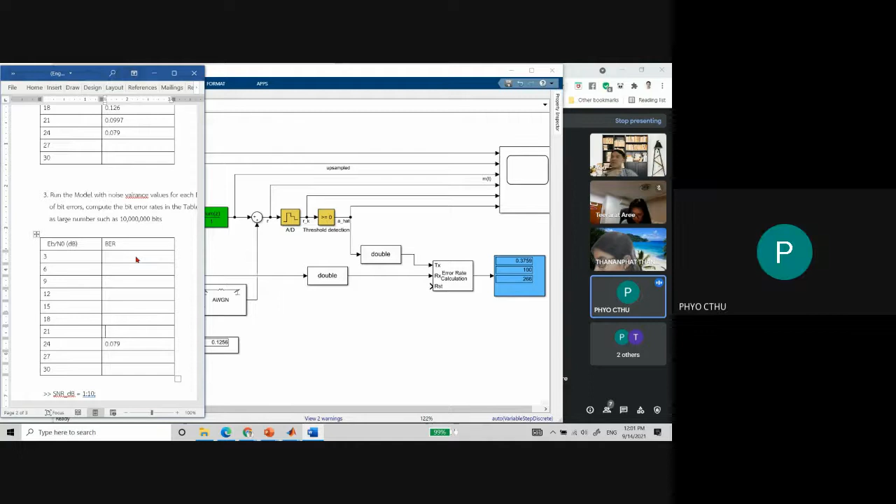Does anyone get any bit error rate for some of these decibels by any chance? Teerarat, have you tried any of these SNR on this left table? Phyo, Thananphat, oh I did 6 for you already, no? 0.3759. Okay, 5.9, okay.

Does anyone try other bit SNR and tell me the numbers, so I can put it in here.

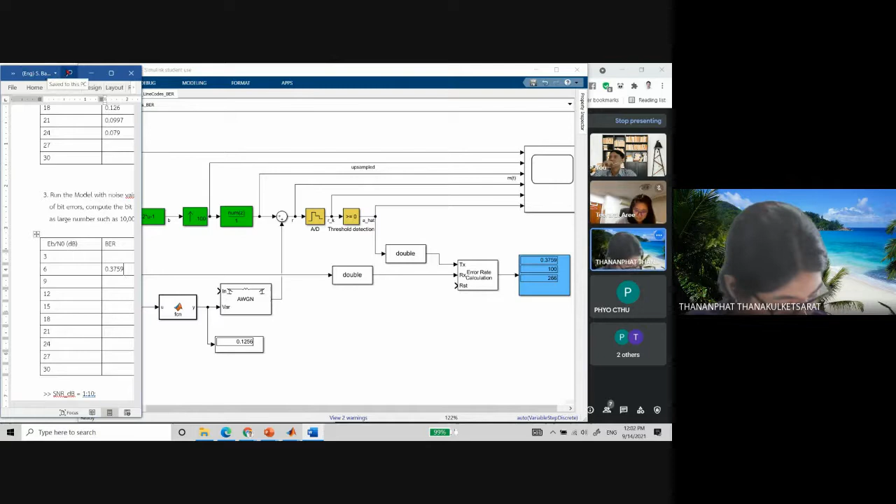No? Teerarat, have you tried any of these? I'm trying. Okay, it's teamwork, okay? How about Phyo? Phyo? Um, no, please wait, my computer is hanging.

Try this, it's easier, no need to compute the variance in this case. Yes, so I need to rewrite something.

For 3dB, I got 0.4965. Once again? 0.4965. Yes, 0.4965, okay. So as the SNR starts to increase, we should see the bit error rate decrease.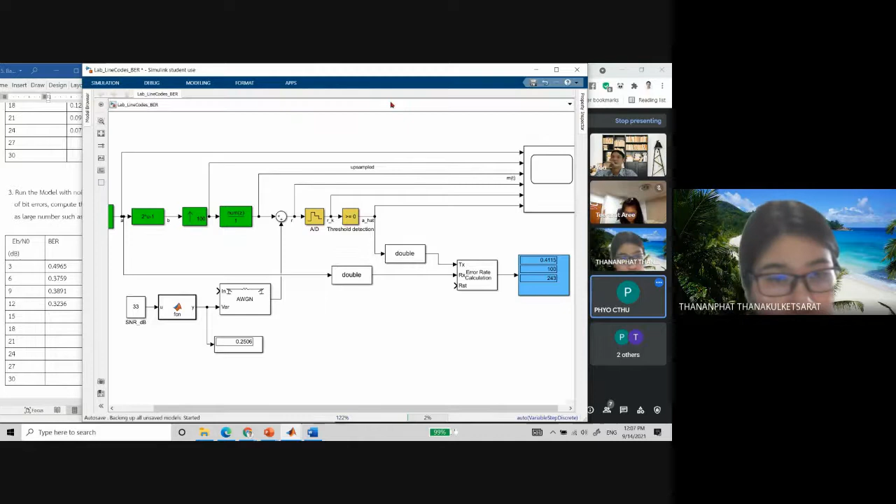Let me try 33 just for fun. How far is it gonna go down? Okay, I'm trying 33 decibel. I don't know how far it's gonna go. Let's see.

No errors, it takes forever. Or maybe 10 million is not enough.

Anyone got bit error rate for 15 decibel? 0.2096. Okay, you don't need to get the same numbers, okay, because we use different seed.

33 is just too much.

How about Hirarat, which one are you trying? Which decibel? 18 decibel? Okay, I'll wait for you. How about PO, which one are you trying? 21? Okay, I wait for you. Thananpat, try 24 maybe?

Oh look at it, I tried 33 decibel, still zero, after all this. Okay, maybe I try 28. I think it's just too much. Should I stop?

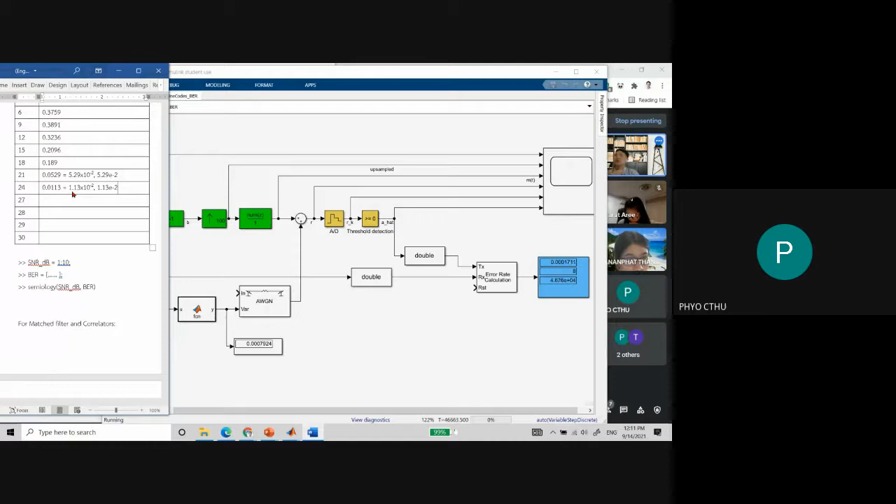0.0113. Okay, or I can write it in terms of exponential as 1.13 times 10 to the negative 2, or 1.13 e minus 2. Okay, and after 24 decibel, it will start to decrease very, very fast.

Now, how about 27 decibel? Can anyone tell me in terms of exponential number? Oh my god, I still have 28 decibel like this.

It takes forever, but maybe because I put too much upsampling. Maybe in the future I should use less, like maybe 10 is enough.

It's gonna take a while. For 27, I get 0.008851. Can you read it out in terms of the exponential number like this? It's easier to say.

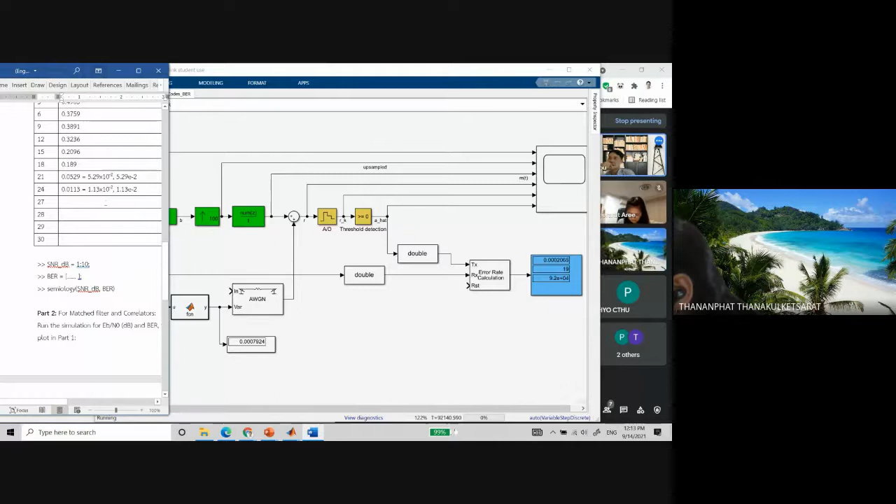8.54 times 10 to the negative... 4, not 3. Oh, 3. Okay, couldn't sum that quick.

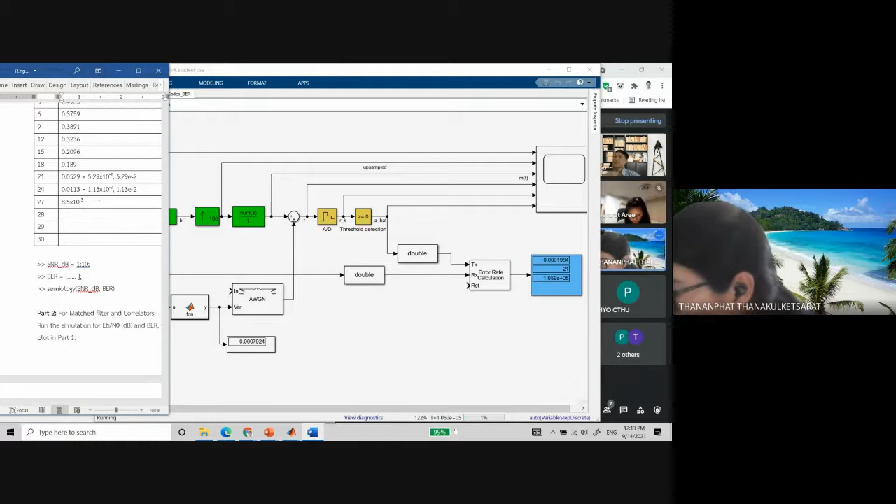Okay, how about 28, I'm doing. But it's so slow now. Now you can tell, I think it's about 2 times 10 negative 4, if you look from the screen. I will just use that number just for simplicity.

Okay, is anyone doing? So now we should do 29 or 30. Yeah, I think 29 is okay, no need to do 30, just too much. Okay, so the last one is 29 decibel.

And then we will plot together. Or we can stop here. It's okay, because our goal is to evaluate the session bit error rate for matched filter anyway, so this is only as a reference. Okay, so let's plot together what we have here.

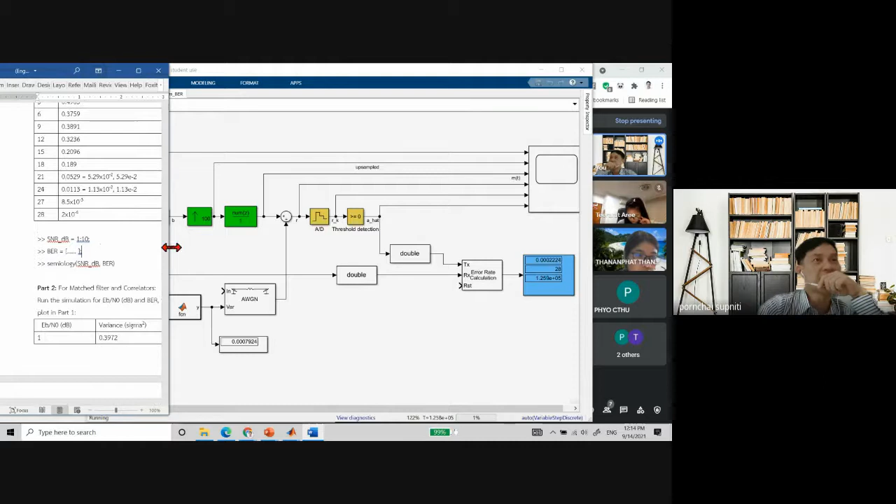Everyone, let's take a look together. This is gonna be what we plot. So when we plot, we'll set the SNR decibel as whatever number we have, which is 3, 6, 9, 12, 15, 18, 21, 24, 27, 28.

And we will write the error rate and then plot according to what we get in the table as well, which is 0.4965, then 0.3759, maybe you can use comma in between numbers, 0.3891. So you notice that the bit error rate doesn't go down so quickly at the beginning.

But once the SNR has increased drastically, then we have a much lower bit error rate. So for the numbers that are becoming lower, let's say 5.29 E negative 2, I can just put it like this, E negative 2. It will be easier.

And let me stop this simulation because it still seems to be like 2.1, right? 2.1. Oh, it keeps going lower, I don't know where to stop.

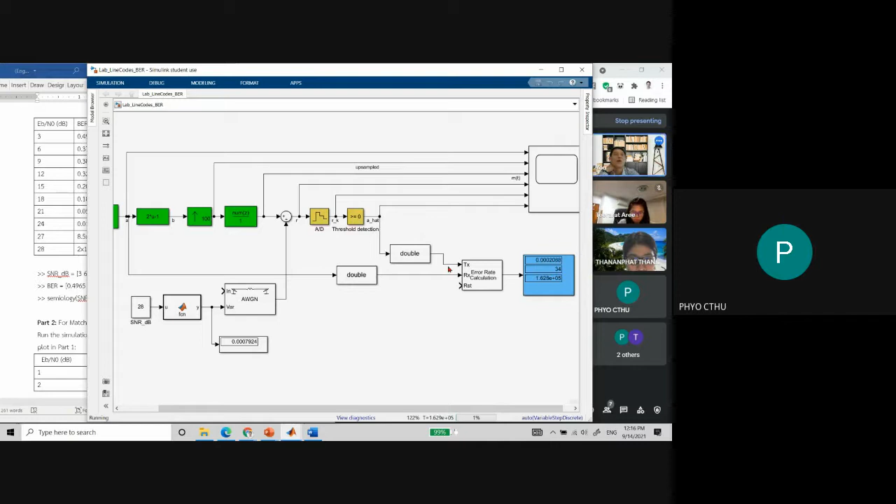That's why we set here the number of errors to be 100, so that we have enough error statistics. So let me go down with 0.2, 0.002 like normal. So here: 1.13 e negative 2, then 8.5 e negative 3, then 2 e negative 4.

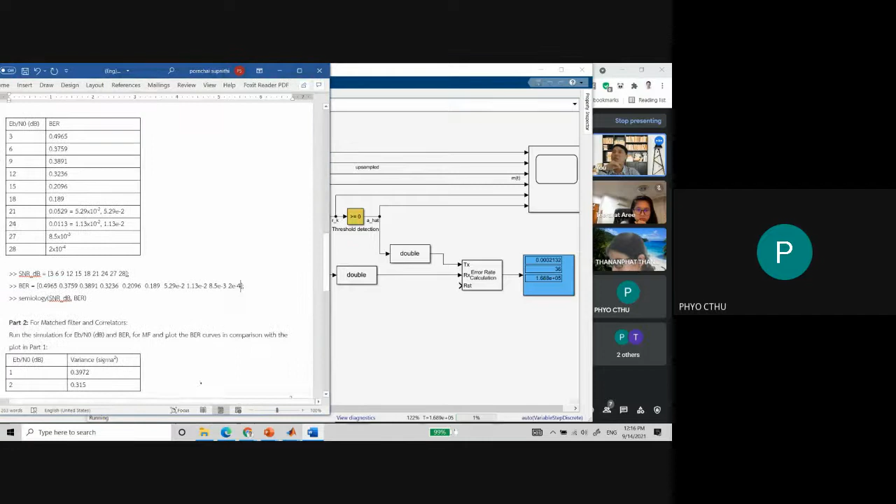Okay, so we'll plot something like this. I'm going to move this to the MATLAB command window just for plotting. If we put something wrong here, it will show an error on the next page. Also, when you add in this number, sometimes you type it wrong and get a very strange curve.

So what we are going to do is plot the bit error rate curve. On the x-axis is the SNR in decibels, and on the y-axis is the bit error rate plotted in the log domain. That's why we use semi-log y.

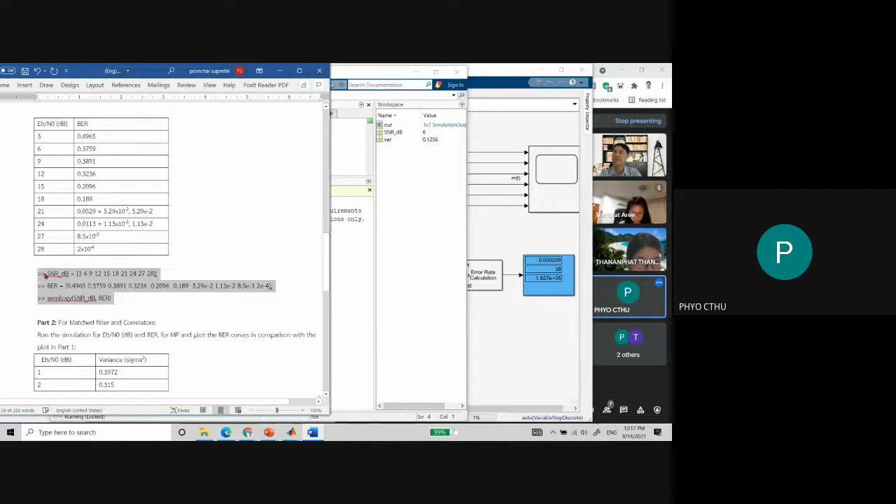So this is what we will get. Let me put a grid here so it looks a bit better. Also, if you take a look, you'll see we don't have the x-axis and y-axis labels. Let me put the x label.

Hey Phyo, can you turn off the speaker?

Sorry, the x label is going to be Eb over N0, in decibels. And for the y label, we will have bit error rate. Okay, so that's what we will do, and this is what we will get.

Okay, this is called the bit error rate curve. On the x-axis is SNR in decibels, and this is the bit error rate. From now on, we will plot this type of curve and compare various types of modulation schemes or systems.

Also, notice if you take a look here, are there any SNR points that look not so smooth? Here, right? Not so smooth. So we want a very smooth BER curve.

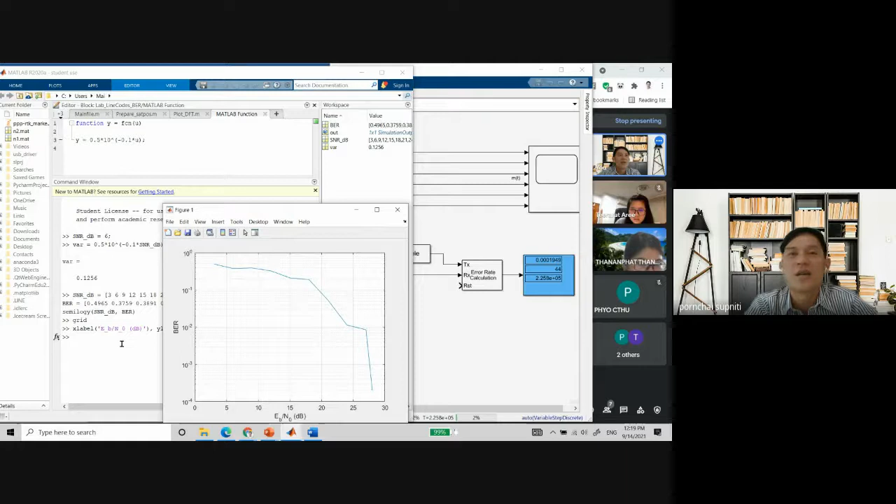Also, here at maybe 27 decibels, who gave me the number for 27 decibel? Was it Phyo or Thananphat? For 27 decibel, who gave me these numbers? So what is the amount of errors you have here when you run this at 27 decibel?

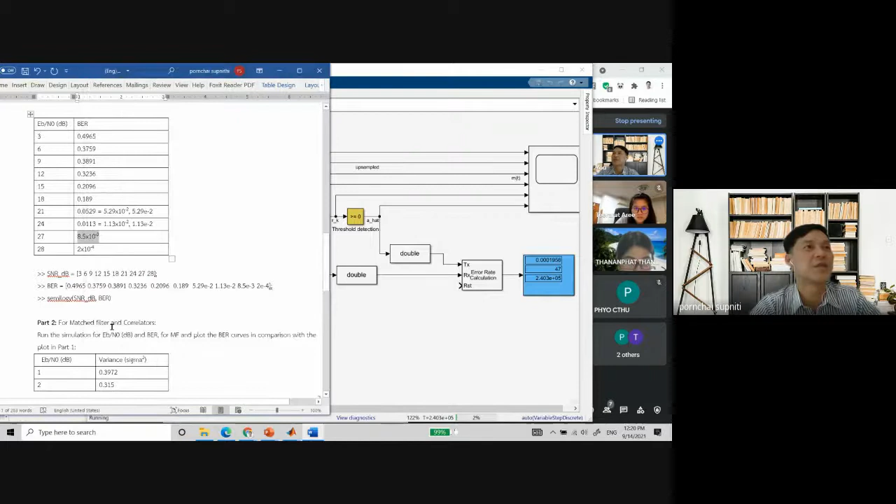There's a reason why it doesn't come down smoothly. You need to have the numbers very small. Here I have 28 decibel, and it's still 46 errors, so that's 1.96 times 10 to the negative 4. Maybe it's better, right?

I think if I look at the graph here for 27 decibel... wait, this is 24. Oh yeah, 27, it's supposed to be lower. I think it should be down here, maybe 2 or 3 times 10 to the negative 3. Okay, you have to rerun it.

The graph is supposed to be smoother.

Okay, so that's it for today. I want you to expand this system but add a matched filter instead, and run from 1 to 10 decibel. So this is the homework for this week.

To add the matched filter, what you need to do is add this block here before the A to D converter. I think that's all.

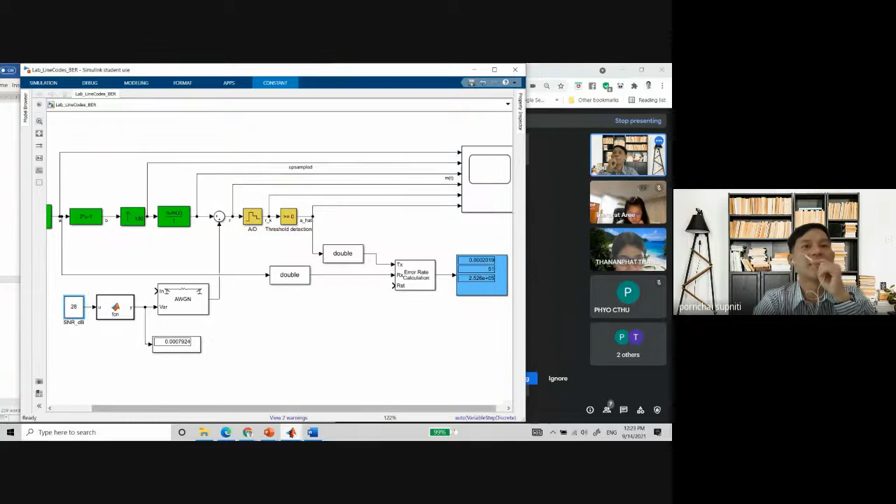I think what we can also do is like this. Let me go back to the homework. So there are two parts in the homework. This is called part A, and this is part B. For part A, I want you to do this.

Add the matched filter to the Simulink file and run the Simulink for only 10 bits. Then plot the output of each block so you understand what they look like. They're supposed to look like a triangle and then a trapezoid, something like that, and then you run the simulation.